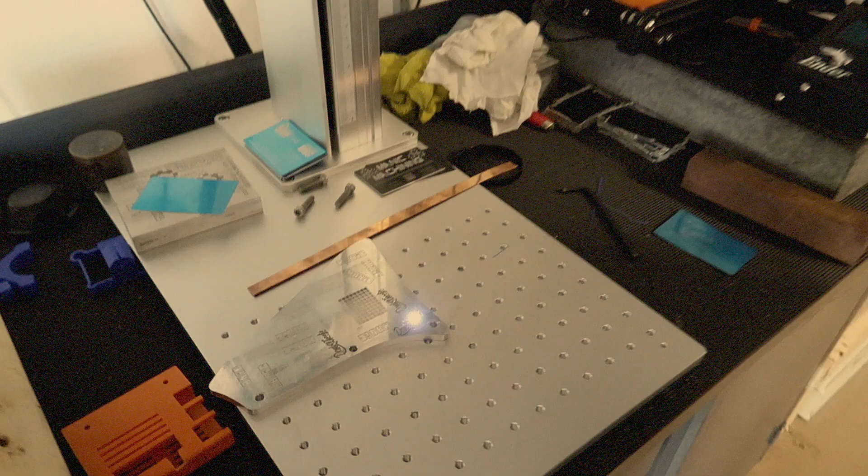Today we're at Manic Machining's house. We're going to be making a handbrake bracket for my ZX6R Ninja, and also for the giveaway bike that you guys can win. We're gonna be making a handbrake bracket out of a big piece of aluminum.

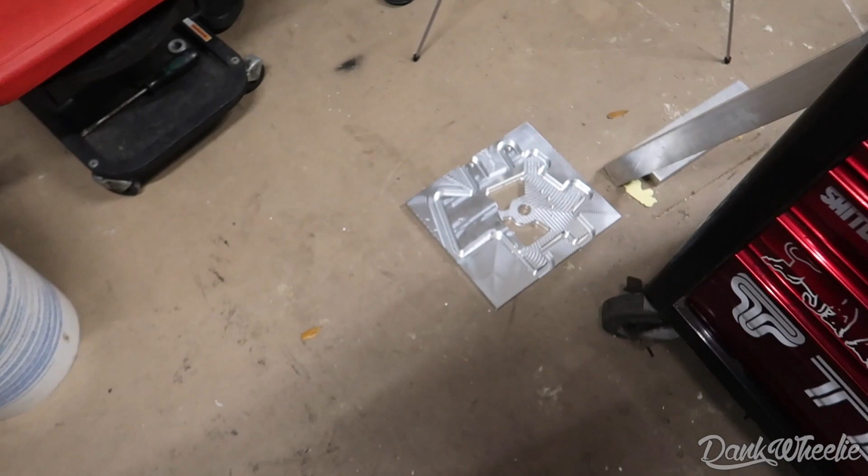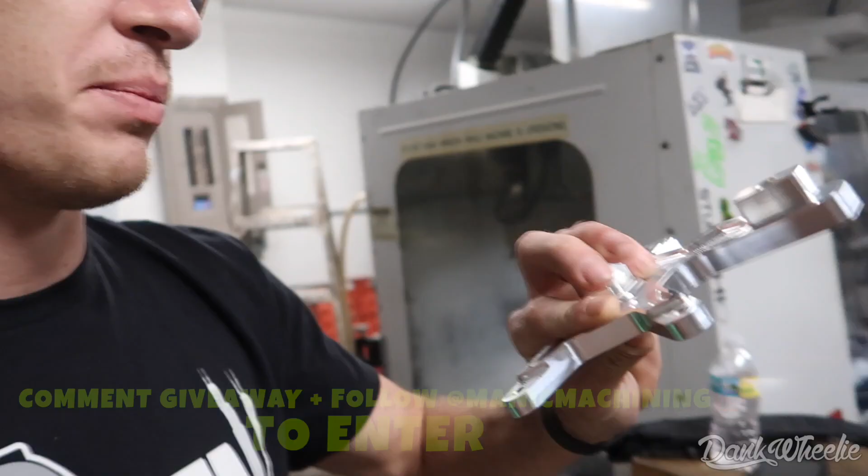This thing is beautiful CNC aluminum. So we're halfway through getting it cut. We just need to get the fixture right.

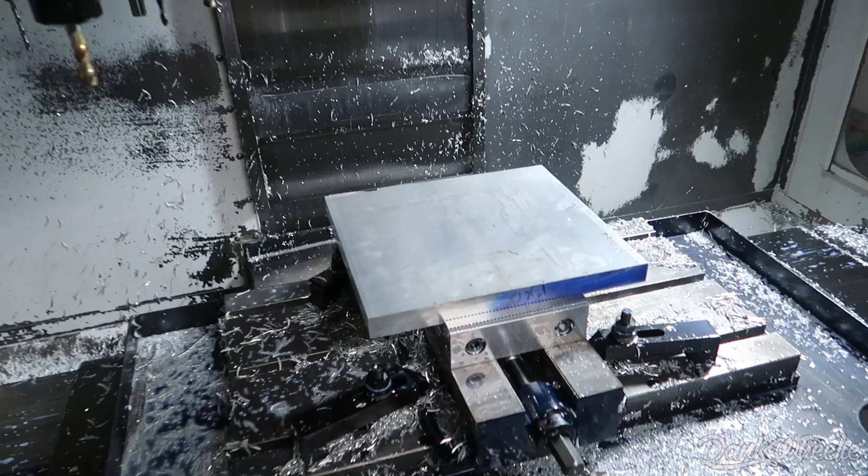Op 2 phase 2 is doing what? Well, we're making a fixture now, so the fixture will hold that, so we can bolt it to it. Pretty much gives us a plate to support it, so we can cut out the opposite side and get all that excess metal off there. Nice, and that'll be pretty much the finished shape. So that'll be the show side and all the fancy pockets.

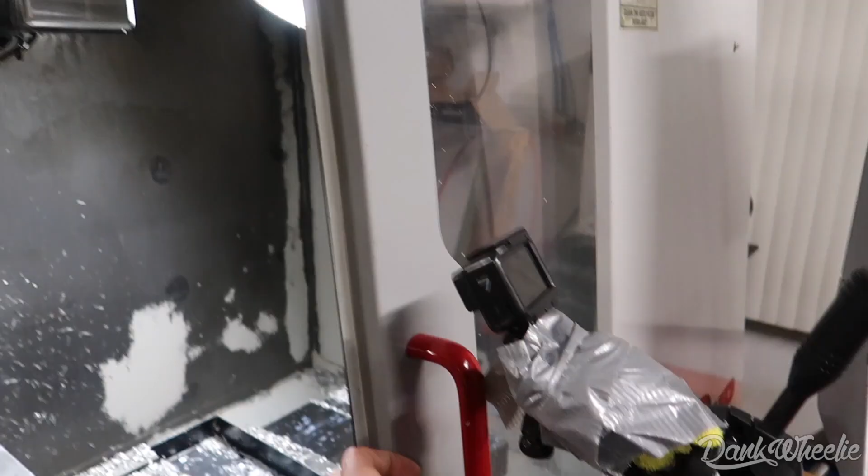But look at our setup. We got the GoPro, some duct tape. Yeah, we're out here. We're trying.

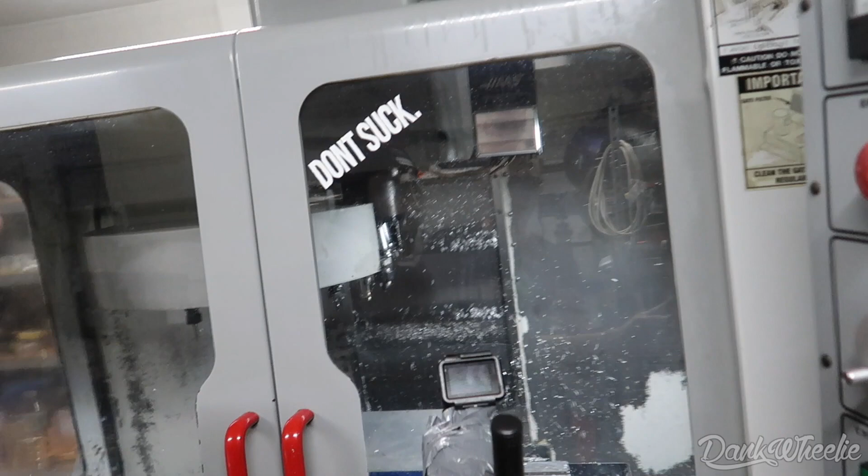Out here he said, can I cut this? Can I cut this? There you go. My man, crazy. Oh alright, so look at this, yeah you can see hitting right switches.

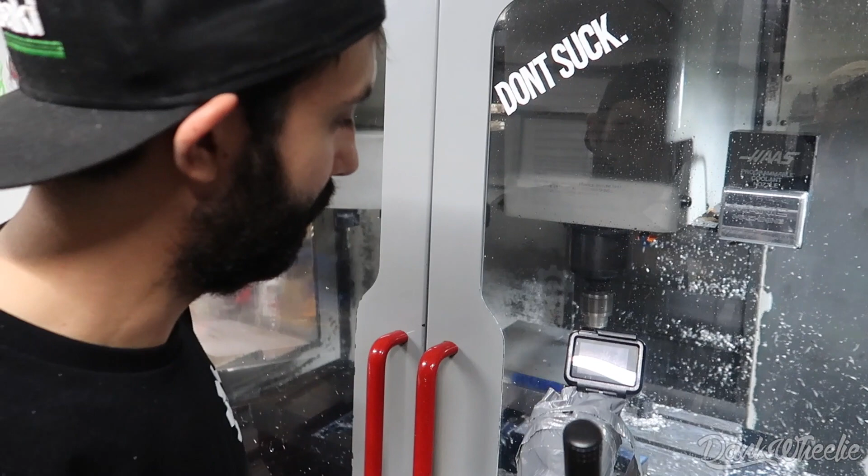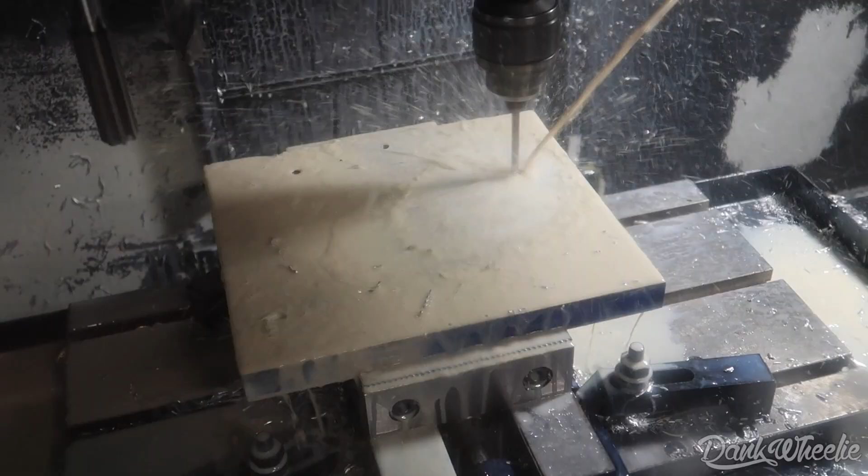It's just funny because the way that this machine is just pulling the tools out like that, he used to have to manually go with a freaking wrench and crank them all out by hand. So what he's doing is he's drilling holes into this fixture where the calipers and stuff would usually go, right? Yeah, alright now we're putting the threads in.

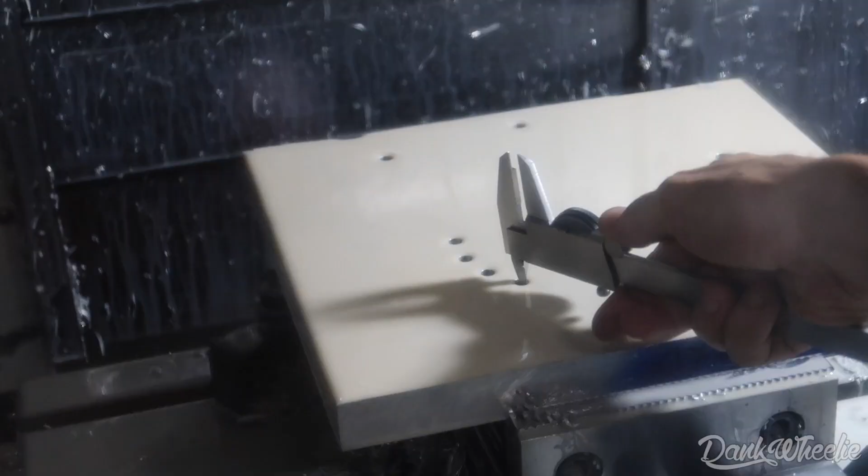More threads. That cuts the bracket crooked. Oh yeah, there you go. There it is, spit it at you.

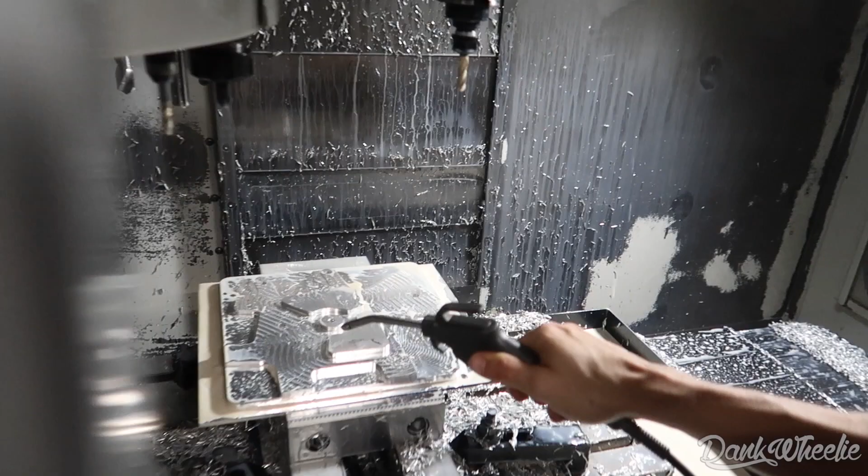Done with the fixture. Chunks. Ooh, non-OSHA shit. It's a little secret.

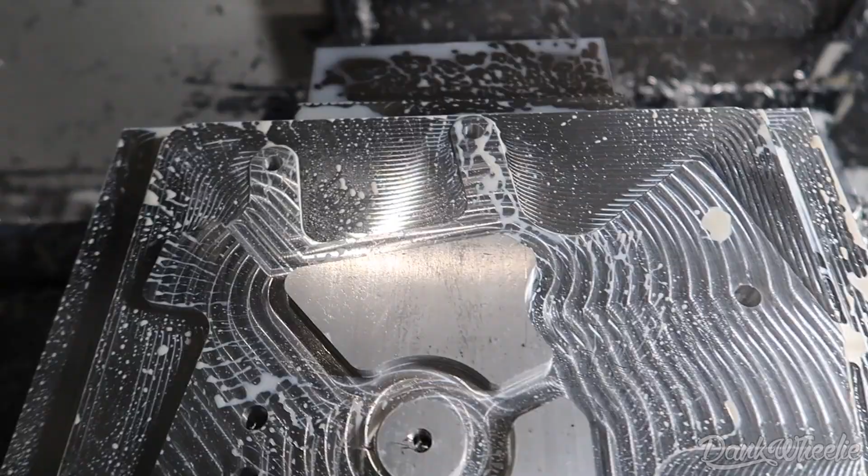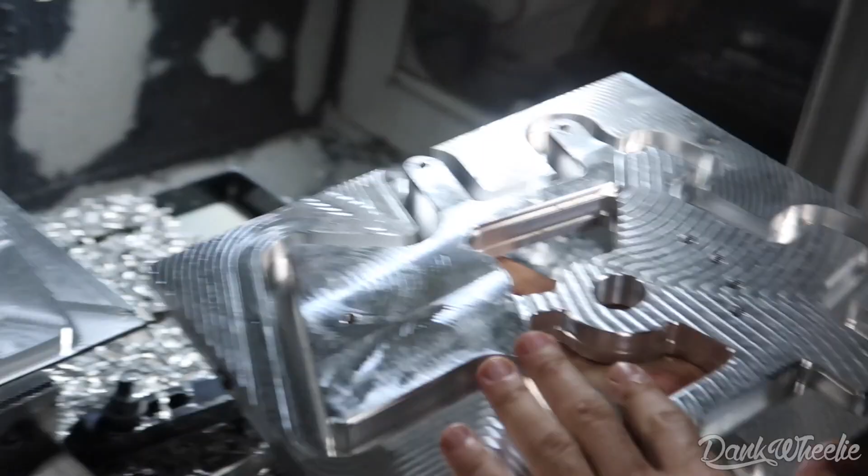So basically the fixture is the total opposite shape of the actual handbrake bracket, so that way they can sandwich together. Now we're putting that in? Yeah, let's see if we have to, may have to cut more off to make it fit. But no better way to try than just...

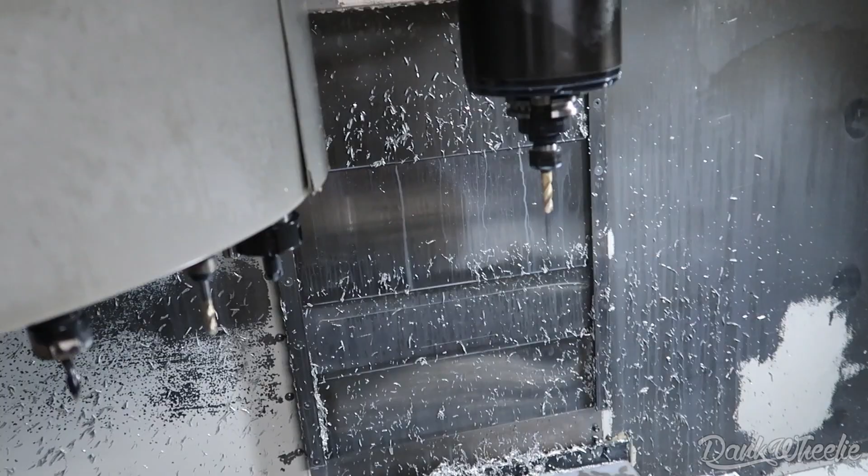You programmed all this so far and now it's just a little bit off, so you're gonna manually trim it yourself? Well, it's not that it's off, it's that if you want something to fit into it, it can't be exactly the same size. Right? Yeah, so we're gonna lie to the cutter about the cutter size and tell it that it's smaller so it cuts more.

And this is the face of the bracket that's actually gonna be showing on the bike.

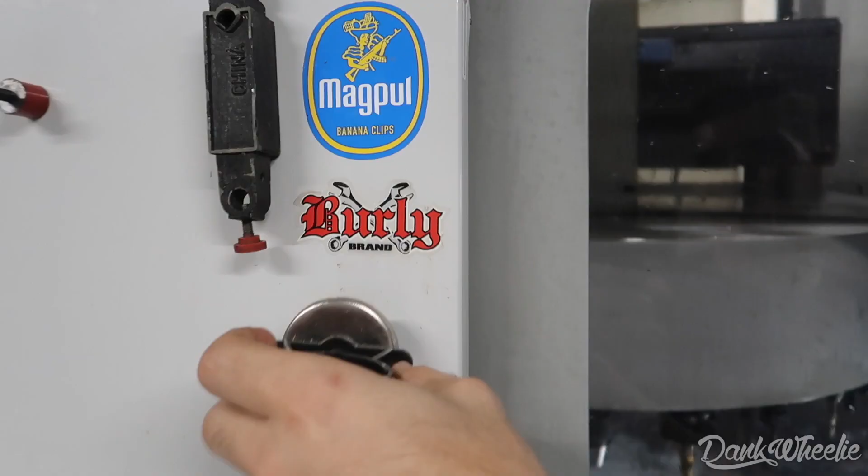This is attempt number 4 or 5. At least we're honest, transparency. There we go. Yeah, but it's not all the way sturdy.

We got to put the bolts in, and then guys, this is the climax of the video. We finally get to see the bracket almost done. I'm stoked, we've been here all day grinding it out.

And I'm gonna run it back just a little bit and show you guys the back end, because just like stunt riding, the worst part is editing. I hate editing, I love riding, but every job this sick has some kind of backside to it, and we're gonna go back to the computer. Before you can do any kind of cutting, you have to teach these computers how to make these parts, and that's exactly what we're gonna do.

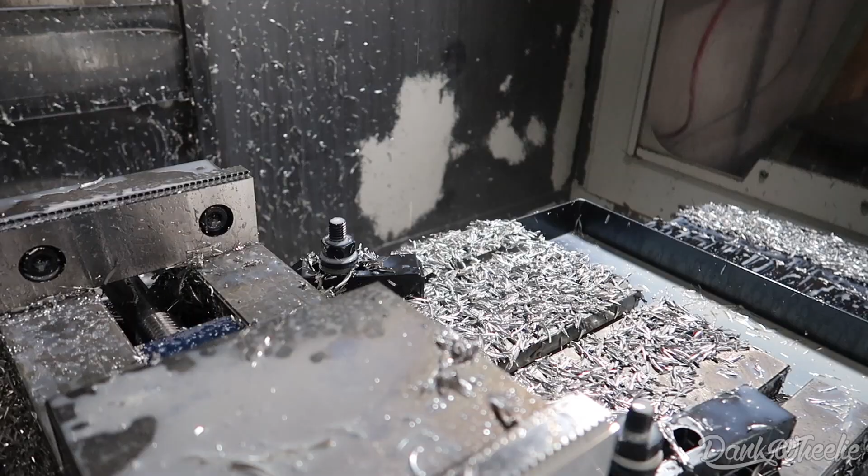Can I do it too? It's like every time it switches to a different bit. Yeah.

Are you making this for me? Maybe, if you do wheelies.

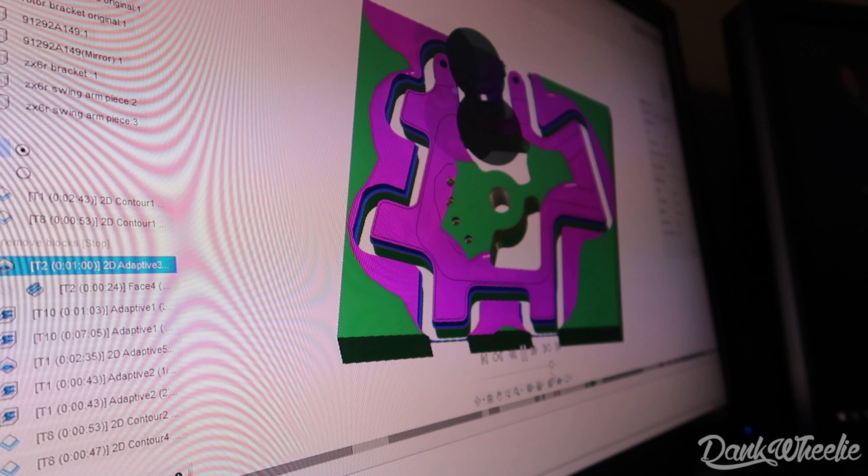I don't know how to do wheelies. So in summary, a lot of boring computer work goes into the design before you can actually get to the metal slinging. It becomes less boring the more you succeed turning the designs into actual creations that work.

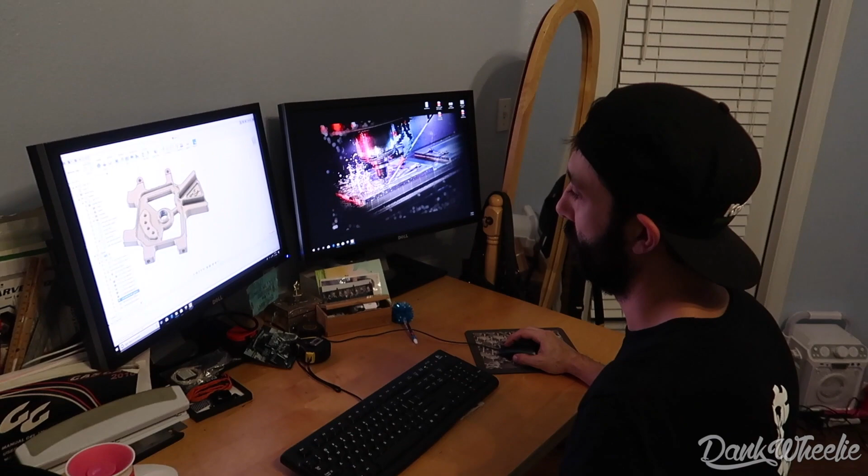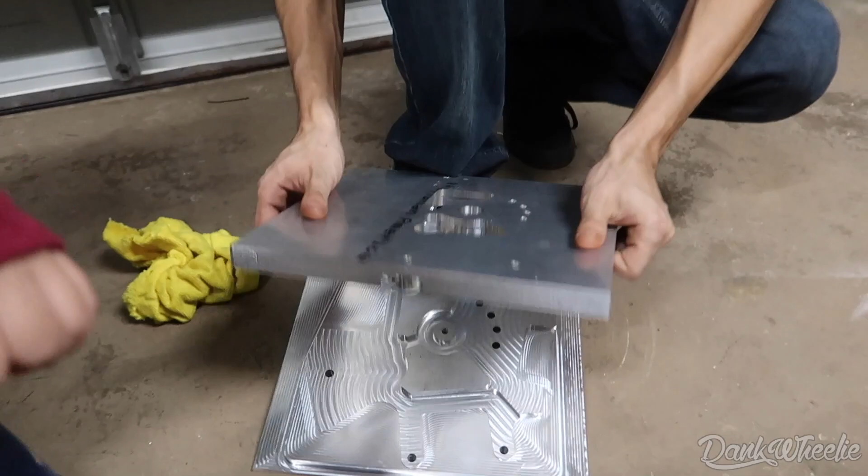Almost done. You know what this is, don't you, Mike? I don't want to talk about it.

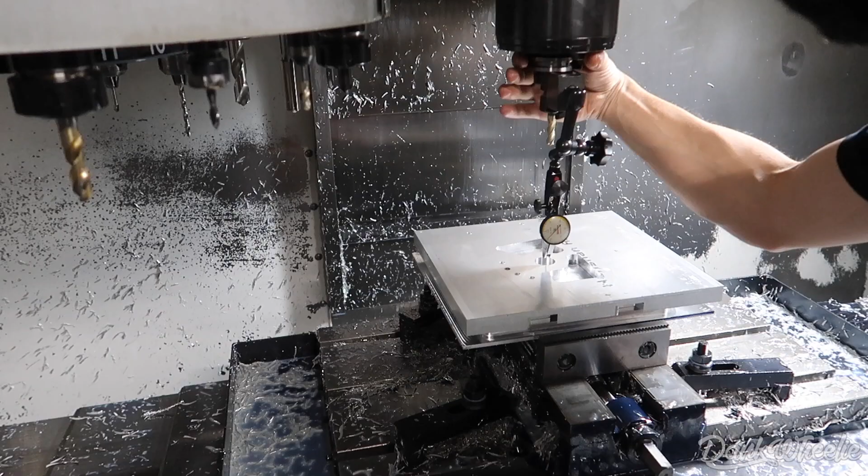Showtime, people. We got the fixture made, now we got the bracket over top. This is the front face, completely raw aluminum right here. It's about to get shredded and make a beautiful bracket, or a big fail. If everything goes right, we'll have 2 brackets. If everything goes wrong, we'll have no brackets and a fixture.

Op 2, commence the shred. Is that the new MacBook? No.

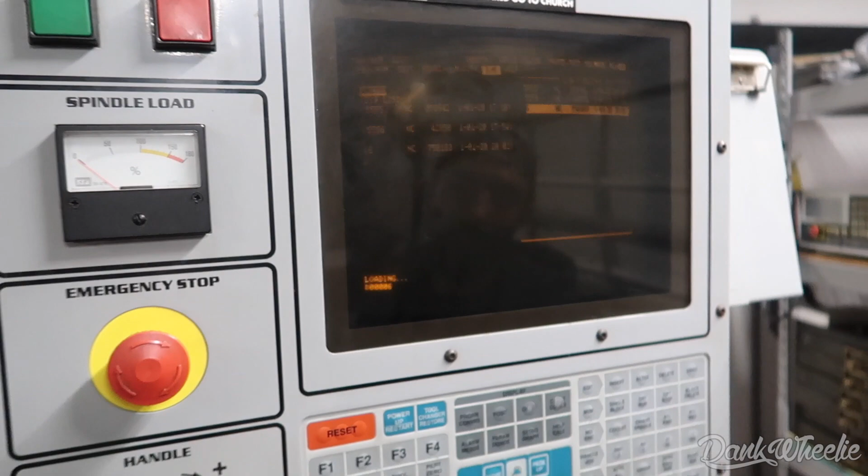Monochrome, all systems go. We got the tripod set. Let's get it, time to cut baby. She's already squirting heavy, showing off. Speeding it up.

Oh dude, you killed it. Dang, wow.

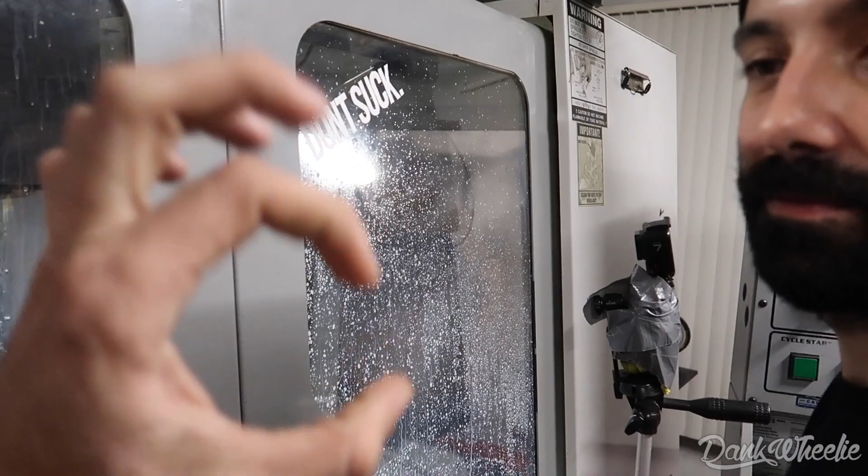Close, it's looking hella good. There's some parts when it's cutting super deep and I forget how thick the aluminum is. It's scaring the shit out of me, like we messed up, because you get stuck staring at this all damn night.

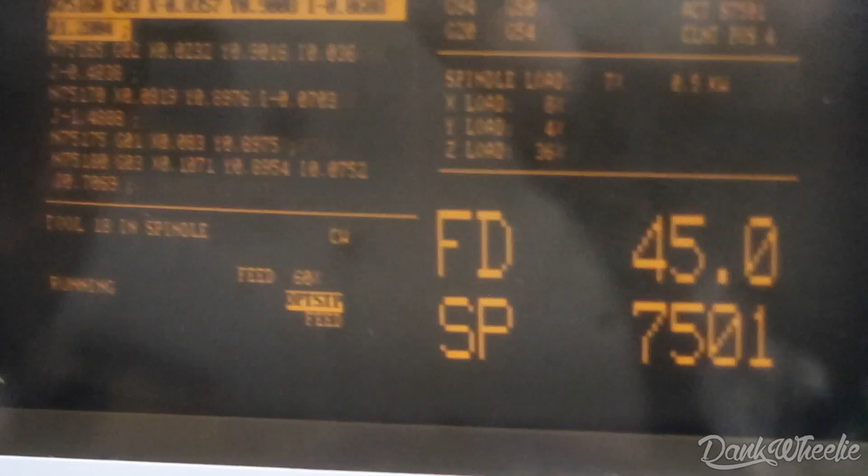I need to build a bunch of stunt bikes so we have reasons to make a bunch of brackets, more stunt bikes for 2020. So as this thing cuts, just going down the axis. Pretty much thumbs up, CNC.

Almost finished product, just gotta put some holes. Hey, where's your drill at? We can do it the quick way.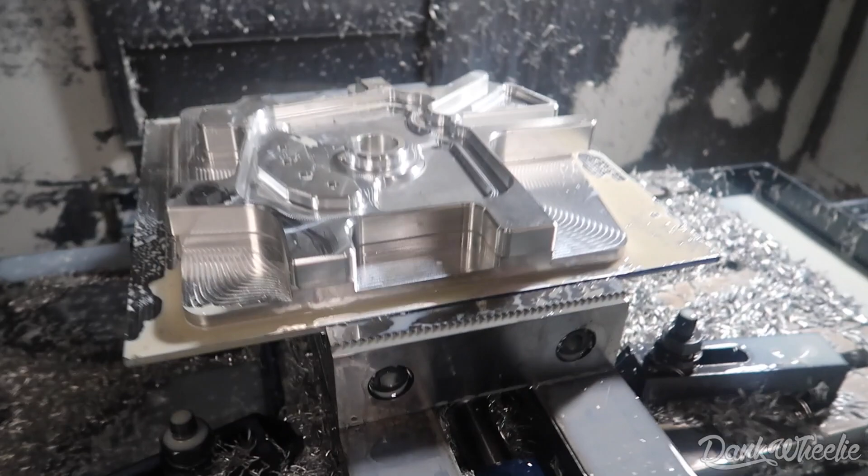No! God, please, no! Do it by hand. Yeah, do it the old-fashioned way. Getting really excited, people.

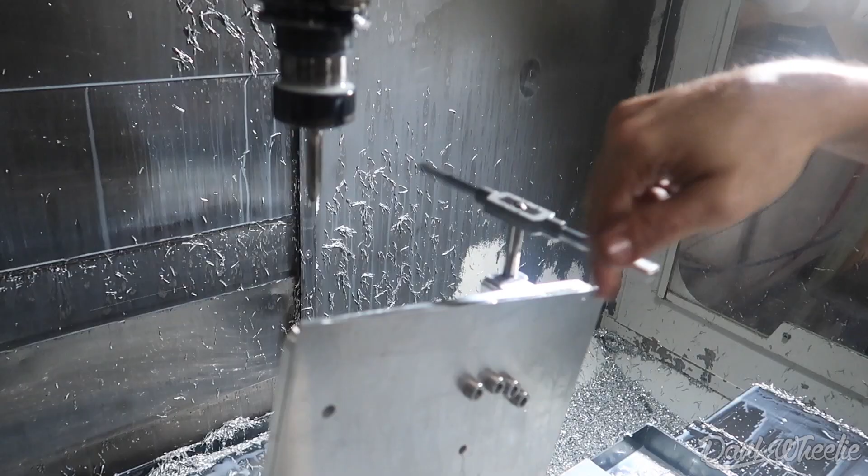Everything's green. Everywhere you look, everywhere, pretty satisfying. The bracket is done, now we gotta take it apart.

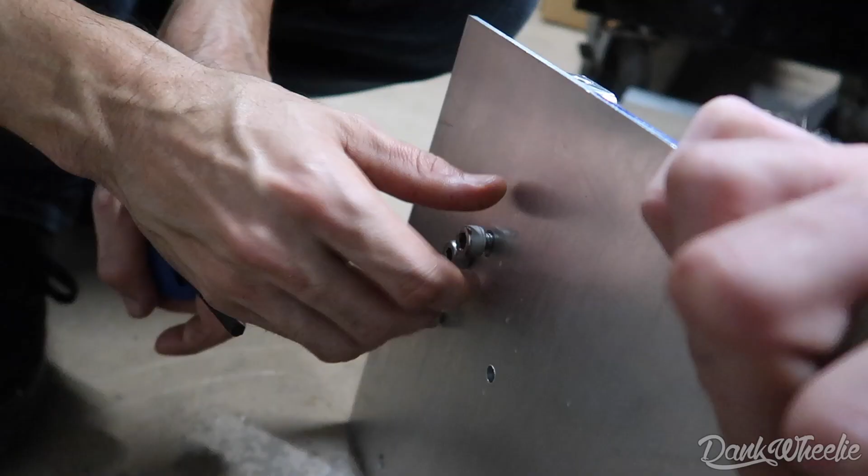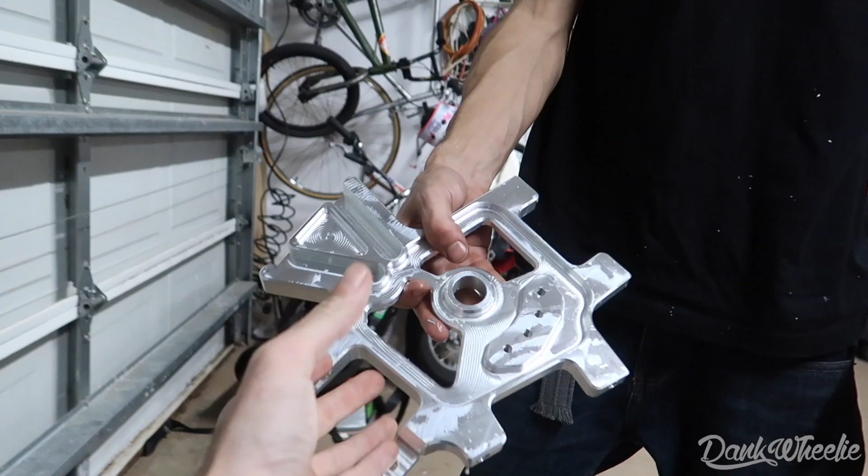Oh dude, good. My God, I think it's beautiful.

So we're gonna do just a little swing arm block next, not now but probably another video, and then this thing's pretty much done. Actually, I think we're missing something. You want that? Yeah.

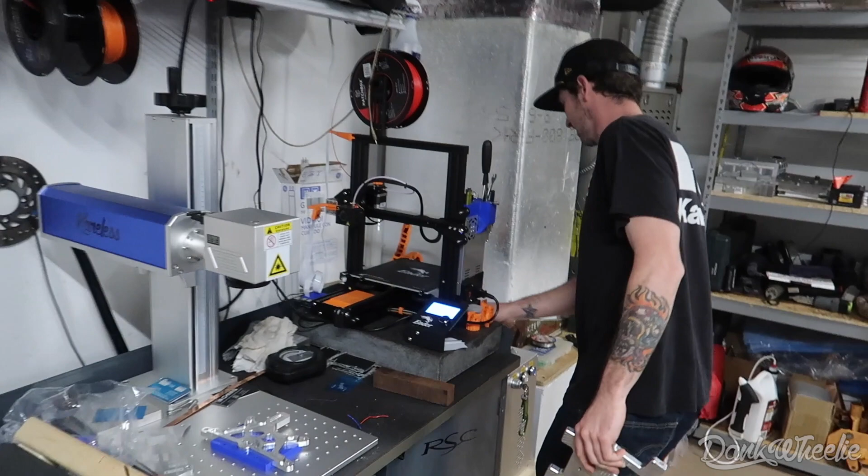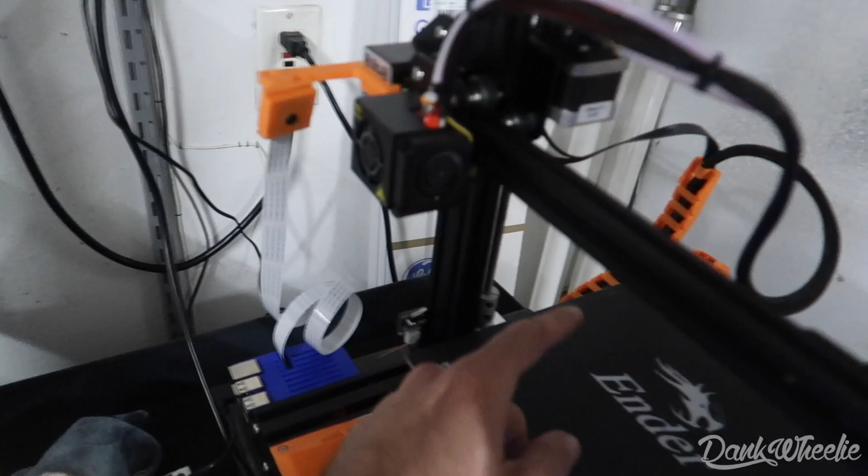Final process, people, my man Zach's been waiting to fire this puppy up. His setup right here is super sick. I was checking it out while Jake was doing some machining, but he's got the 3D printer right here, and a lot of stuff on here, all these different colored things, are little bits and pieces he made to help out with the machine, like a little feeder and stuff like that.

But I was getting really hooked on it. I kind of want to get a 3D printer myself and try it out.

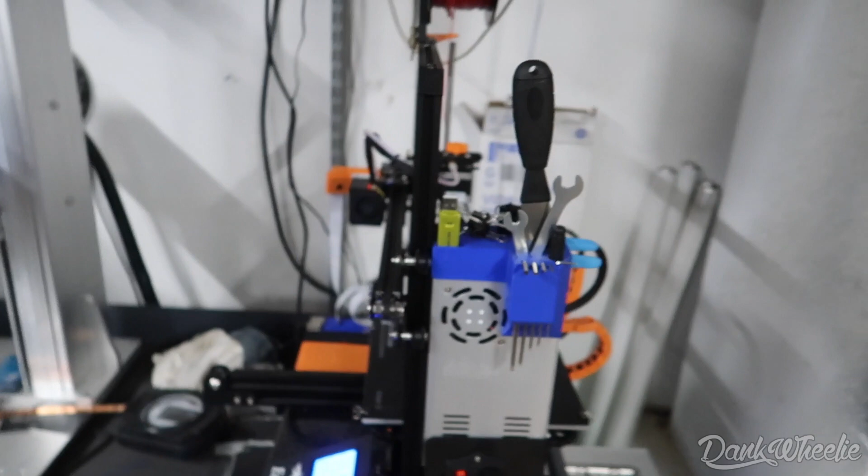This is the Grom bracket. He made a fixture for it so we can set them in there and get them engraved nice and even, it's a nice little setup. We took a couple weeks taking our time getting it all designed, and then we still got to try it out, but it looks pretty damn promising. What do you guys think of it?

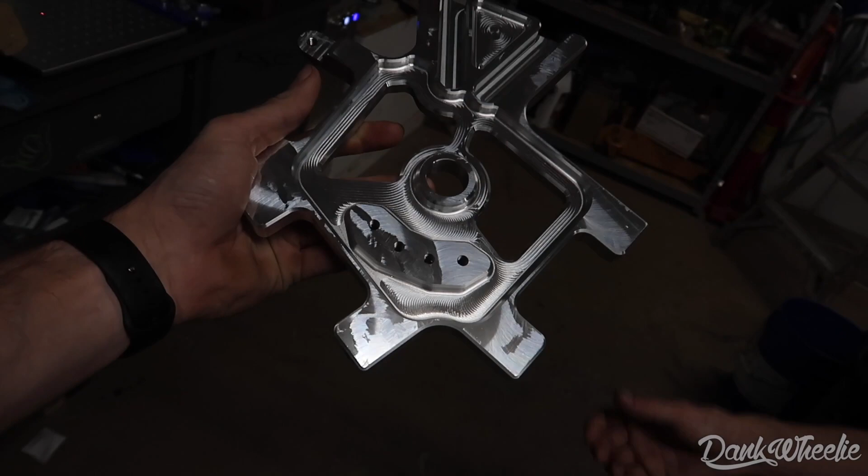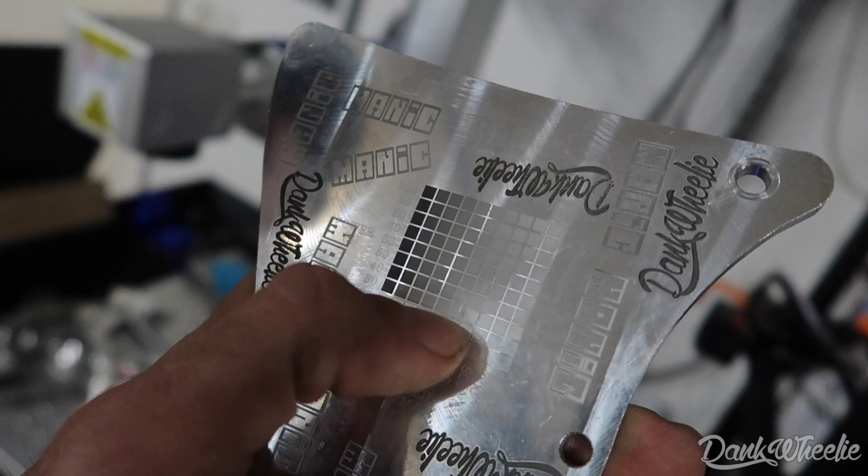And then this one is your depth and your speed chart, I believe, right? Yeah, right here. Tells you all the different colors it's gonna make through all the depths and speeds you're running.

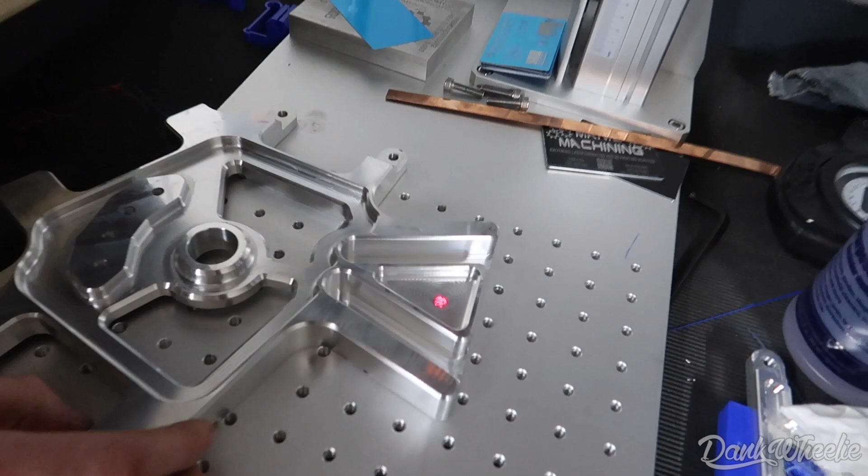This one you can see it, but it rubs off super easy, you know? But this one doesn't rub off. Does it let you, oh yeah, I was gonna say, that's so sick. Trying to get a little bit on your side. Wow, let's see what we got going on.

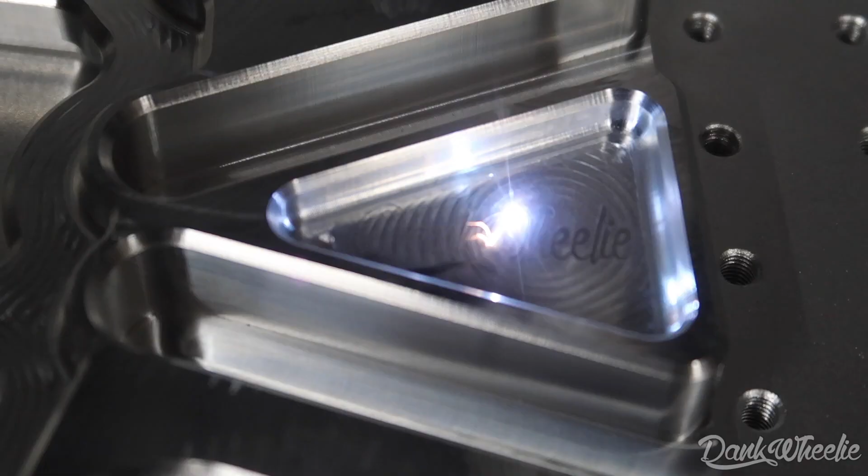That'd be a gangster intro. Alright, now it's just gonna do it 5 times. Oh yeah.

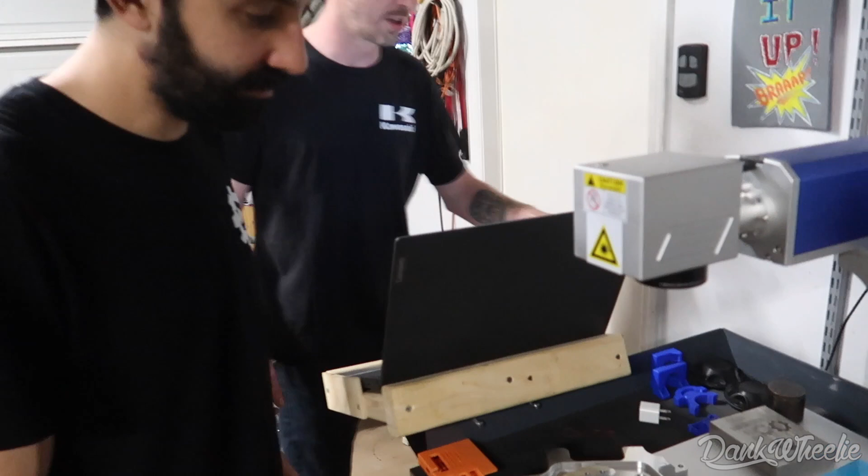I say we're done, boys. That's a wrap, yes. Out here at the Manic Machining, getting the job done, people, one day, we got her done.

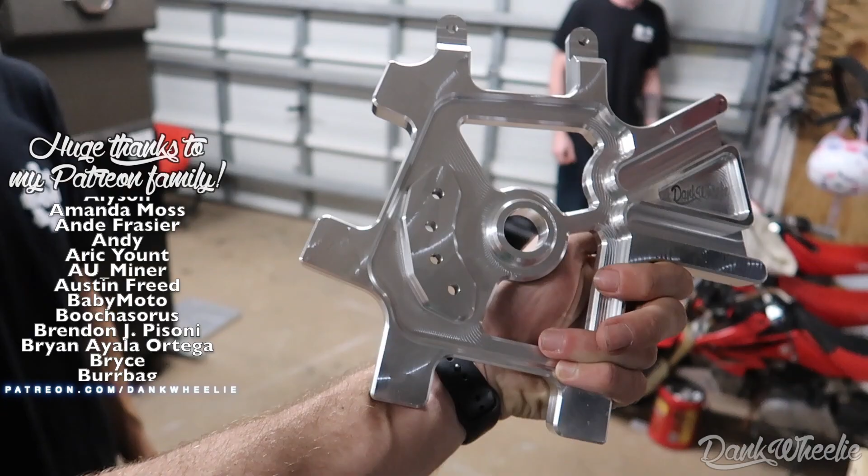Now we gotta test it with some wheelies. Yeah, exactly, all about that one.